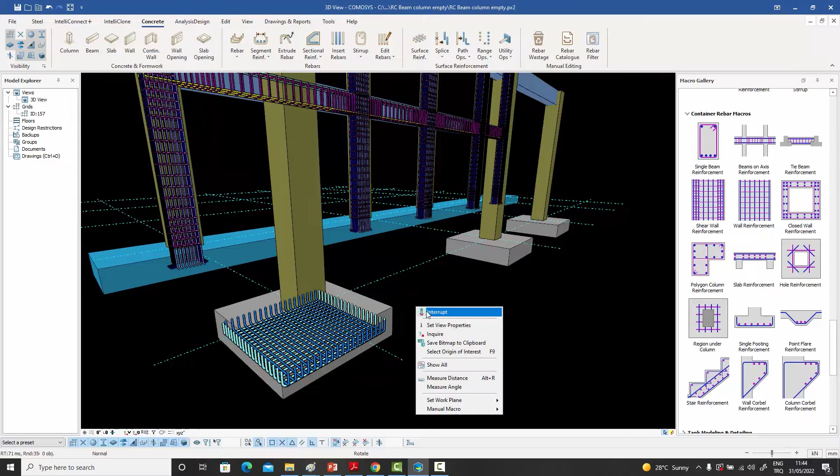So these are the container macros which will get your work done even faster than manual detailing for the normal, most frequently found cases. Now, just to give you an idea about how they work, let's try the single footing macro, for example. Just select that, select a single footing, right click to confirm, and then show it a direction for the main side. And the moment you do that, it creates whatever the defaults are for the single footing macro.

And what you can do is you can select any one of those bars and press M once to go to the surface macro, but M twice to reach the actual container macro, and then press enter. And it will open up, and you can see there are lots of options inside. You can have top reinforcement, bottom reinforcement, you can have lacer bars as well.

But what I want to show you is you can have your company standard set up for different types of situations. So here I have a 2 meter by 2 meter by 500 footing set up in my machine. I just load that. This is my company standard, and I say apply, and immediately my company standards are rolled out for that particular footing.

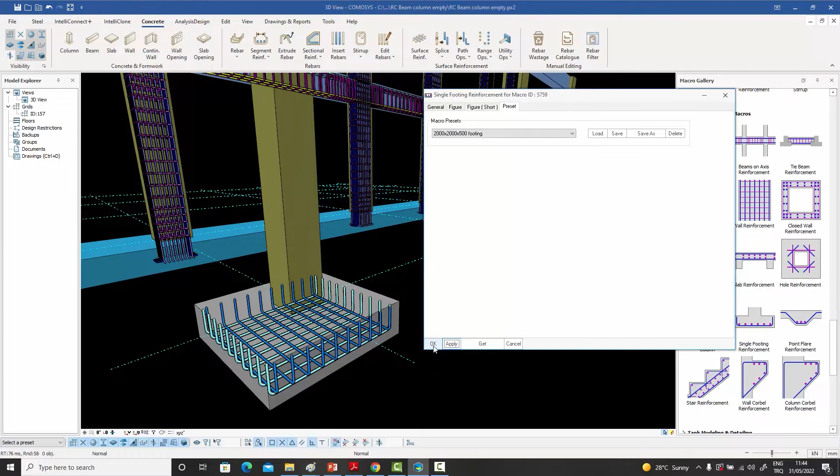Now, once we are happy with the single footing, what we need to do is we need to copy these rebars to the other footings. And while this case is very simple, we only have 2 rebars and we can select them very easily. But imagine a more complicated scenario in which a particular assembly has dozens of rebars and the neighboring assemblies also have their own rebars coming in, so selecting the rebars in this jungle might become difficult. So imagine you've got 25 rebars over here and another 50 coming in from other sides, from the tie beams and this and that. Actually, just selection could be a problem.

So what we can do is we can select any rebar belonging to that assembly, right click, and say select same parent rebars. And immediately, whatever rebars belong to that particular footing of the bar which we selected will be selected very conveniently. And once you have them, you can just right click and say copy to another object.

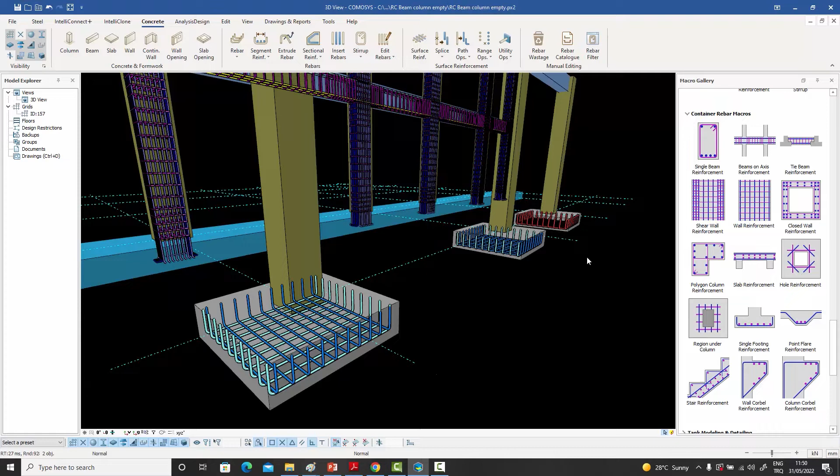Then you can select the source footing, and then you can select the target footings, and immediately your single footing or whatever it is that you're copying will be copied.

Now let's move on to the column macro, for example. So I just select the macro and I say select the column, right click, and it asks for a foundation, which it might need to embed the starter bars. So I show it the foundation, right click, and the macro is run by defaults.

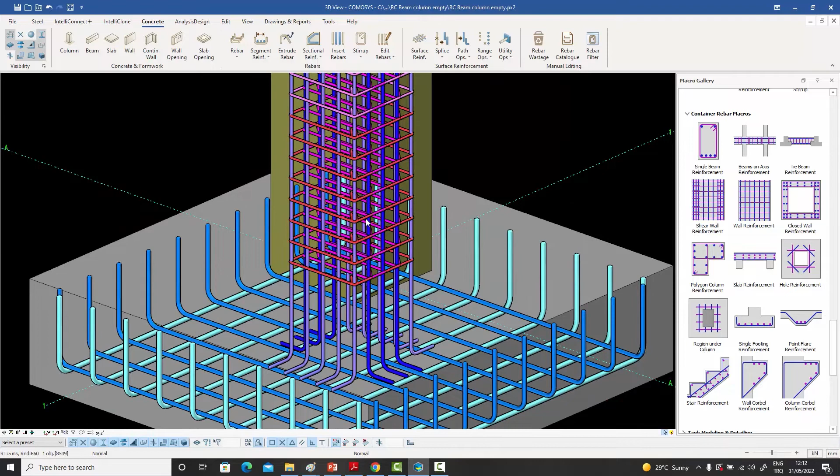All I need to do is just go inside the macro and see if I have any company standards set up. So I've got this one for similar columns. I just load that and press OK. And immediately my column is modified, or my column reinforcement is modified according to my company standards for that kind of a column.

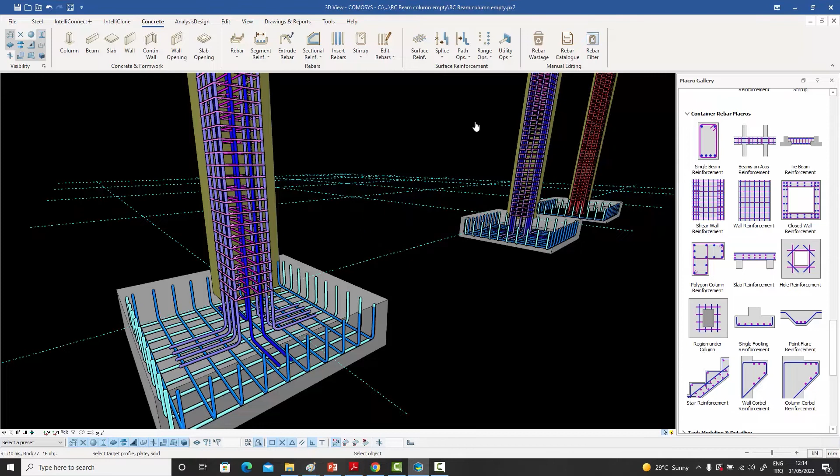Now, this could be a situation where the selection I just talked about could become difficult. So you just select any bar belonging to the column, right click, say select the same parent rebars, and the entire column rebars are selected. Right click, say copy to object, show the column as the source column, and show the target columns and the other one. And your column reinforcement is created in front of your eyes.

Now let's check the beams on an axis. So it could be a long axis. It doesn't need to be just 2 beams. It could be 3, 4, 5. They could be of different dimensions and different spans as well.

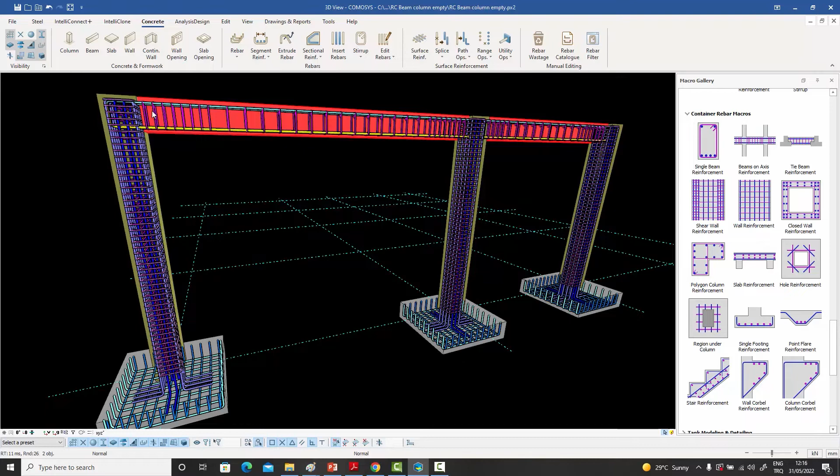All you need to do is just click on this one, select the first beam, right click to approve, select the second beam, right click to approve, nothing more to select, just right click again, and your beam on an axis macro will be created with your stirrup confinement regions, 3 different confinement regions and all that. And you can go inside and it will show you that you've chosen 2 beams.

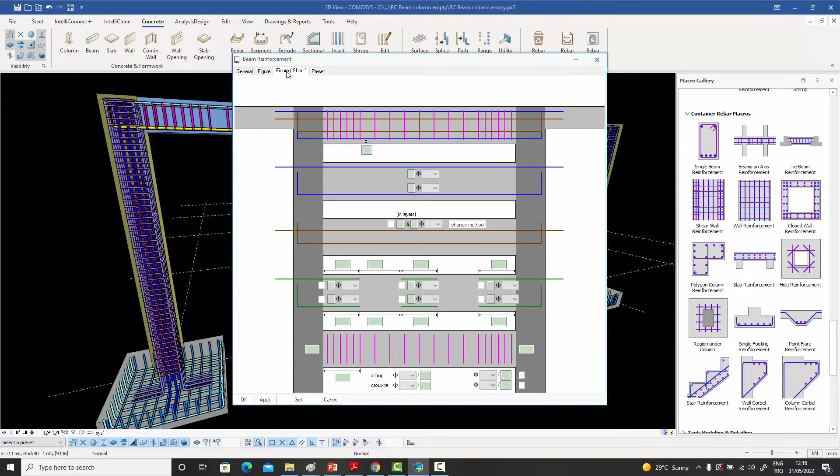And for each individual beam, you can go to the data section and you will have complete control over the top reinforcement, bottom reinforcement, intermediate layered reinforcements, the stirrups, and basically everything you see on the screen, in the figures. You can even have different embedment details for each individual one. So basically, you have complete control over what you can do with the individual beams over here.

Now, finally, for the container macros, because I don't have time to go through each one of them, but you do get the picture. Let me just quickly show you the shear wall macro, for example. You select the wall, you right click, there's no other wall to select. It asks for a starting surface, so I can show it this side surface. It then asks for an ending surface, I can show the other side. And then it asks for an inner surface, so I'm going to show it this inner surface.

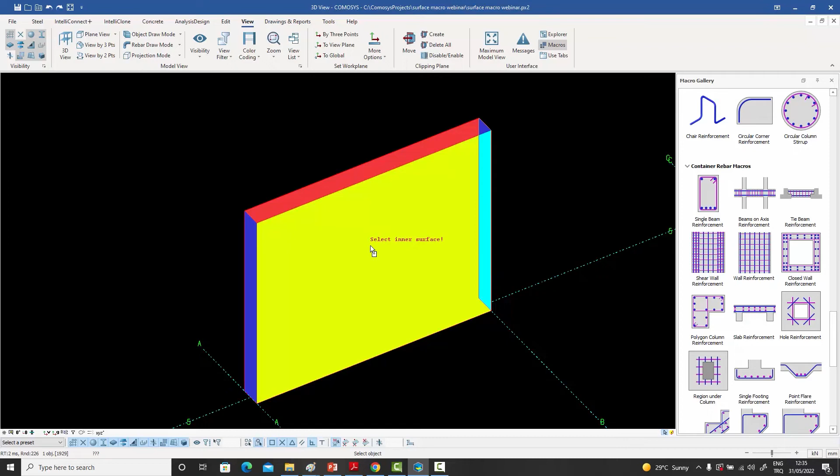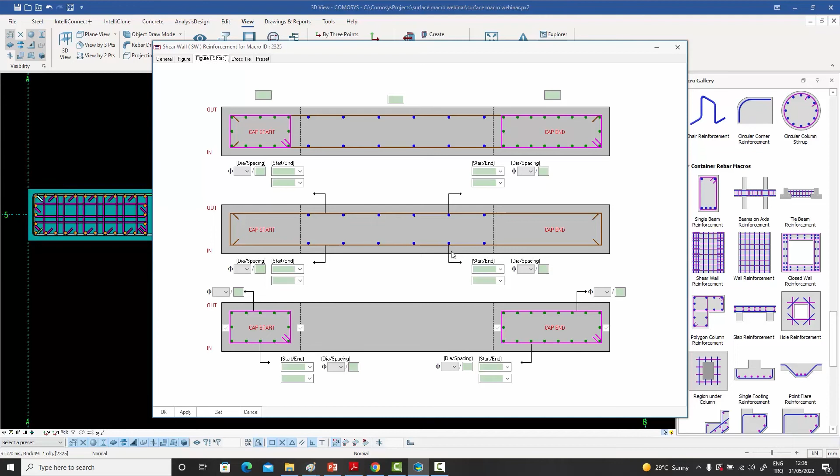And the moment I do that, let me just look at it from the top. You can see that the container macro for shear wall has created a basic shear wall reinforcement very quickly. Obviously, these parameters are all modifiable, and we can open it up and we have the start area and the end, cap start and the cap end, and we can have different parameters for each one of them and different longitudinal reinforcements and cross ties and this and that. So we've got a lot of detail over here.

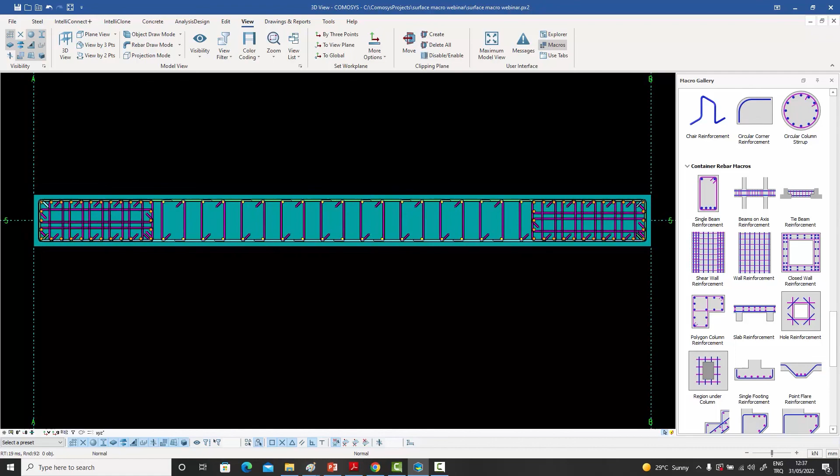But the point of the container macros is to do very quickly whatever things are very commonly used in reinforced concrete detailing. But once again, at the end, I'll emphasize that you can always go back to your general detailing, and they're very fast as well. We're using the copy, mirror, and mirror and rotate commands, etc. Using the handles, using the linear tapered, circular tapered, sectional commands. You just saw all that. But obviously, when you have your very standard beams and columns and walls and footings, then you can come back to these as well.